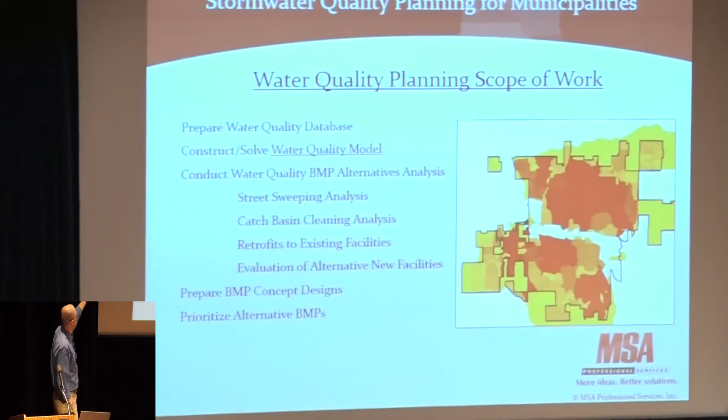Then we construct this water quality model, and again, that's really the bulk of what I'm going to talk about today in terms of conclusive evidence. We do this water quality BMP alternatives analysis. So we can look at street sweeping, catch basin cleaning, retrofits to existing facilities, and then of course the all-encompassing build something new.

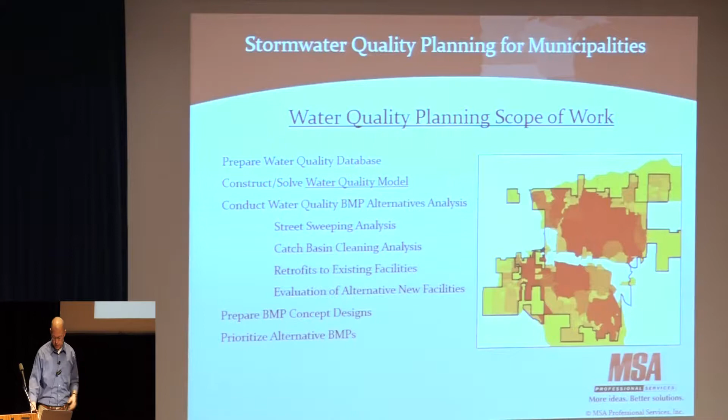And again, the idea here is we're looking at municipalities who are looking to make things better. And so let's look at the existing system first, because you've got a lot of investment in infrastructure, and by making small tweaks for relatively low cost, you can get quite a bit of improvement. Then we do some designs and prioritize according to social acceptability and, of course, cost effectiveness. All right. So again, I mentioned we're going to go through this pretty quick, but how do we develop this water quality database?

Pretty standard fare. You start out with some nice mapping. So on the board, we've got a drainage network, and the red lines represent the sub-watersheds that go to it. So we're looking for the natural channels, the ditches and the swales, roadside drainage systems, storm pipes, and of course your BMPs, your management practices.

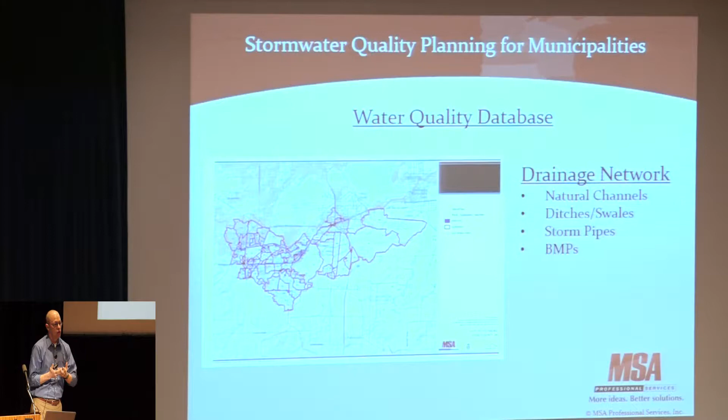So you subdivide all those things up into what's draining to what, and what's a critical resource, and what is it you're looking at. And of course, if there's a BMP, you want to delineate everything that's draining to that BMP, so you have an idea of what is the load going to that BMP and what's the demand that we're placing on it.

Well, then you add a layer, and those of you who are familiar with GIS understand that there's all these different layers. You can put them on top of each other like old style transparencies, and then as you look down on them, you can see that there's all this different information that's confined to that geographic area.

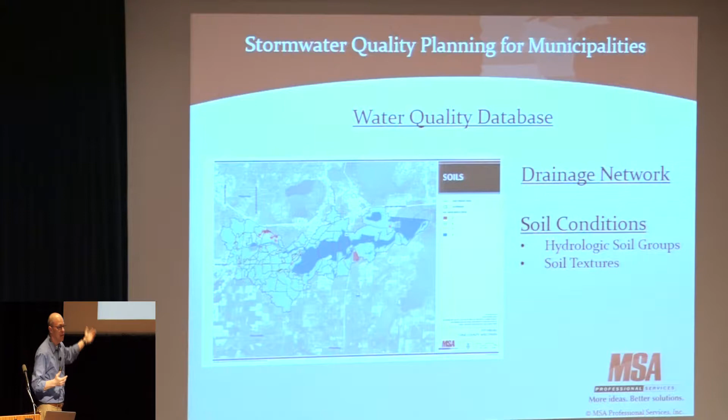A lot of the models are concerned with runoff from impervious areas, which I'll get to in just a second, but also from the pervious areas, from the turf, from the vegetated areas, things like that. And the two principal ways of looking at that are either through the hydrologic soil groups as classified by the USDA, or by the soil texture, which also are classified similarly. Sand, silt, and clay, or HSGs A, B, C, D, which are more or less comparative. And so you get a map like this, same watershed background.

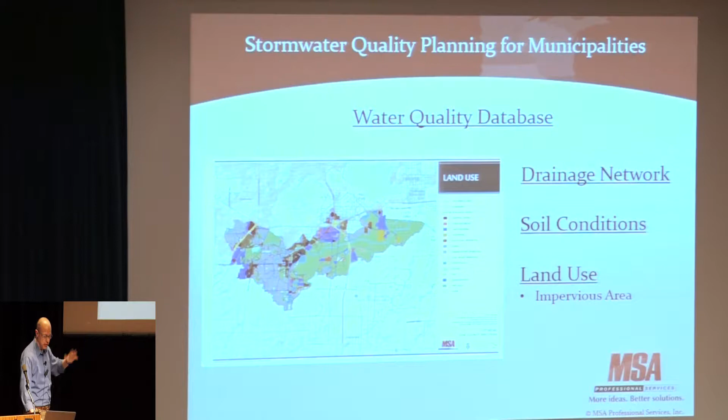And then finally we look at land use, which leads us to impervious areas. So the land uses you're looking at there are open space and low density residential, medium density, high density, industry, institutional, that type of very standard fare for urban planning. Where it really gets important is identifying the impervious area and the connectivity of that impervious area.

So the connectivity just has to do with, you've got this roof or you've got this parking lot, this impervious area. What is its drainage characteristics relative to the stormwater collection system? Is it directly connected, or does it flow from the impervious area onto a length of pervious area and then into the collection system? And at what point does it become disconnected? There's a very, very significant difference in the runoff contributions as well as the pollutant transport from impervious area that's connected versus disconnected.

So what I'm showing on the board here is a little study we did for a suburb of the city of Madison up in Wisconsin. And they didn't have a whole lot of information on their land use or on their impervious area. So we just took some samples and we said, hey, this neighborhood looks like it's got a different development pattern, and this neighborhood has a different development pattern. And the black polygons you see there are the different layers of imperviousness.

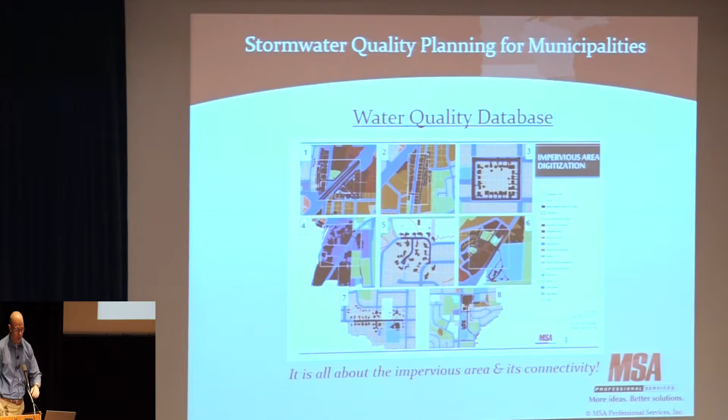Well, then you can apply various rules of thumb to say, all right, is this type of impervious area connected or is it not? And this is a whole bunch of text that I gathered from about a 5-minute internet search of impervious area connectivity. And I found references from Philadelphia, Wilmington, North Carolina, Washington, D.C., and New York, and the state of Wisconsin in particular have statewide standards for people who are doing stormwater quality assessments to determine what the level of connectivity is.

And they all kind of boil down to the same thing, which I've put on the board there as sort of the envelope of occurrences. And it's kind of interesting, they're very specific because you've got to be specific when you're doing calculations. But the first bullet says contributing flow path is no more than 75 feet. Well, darn it, I'm at 76 feet. I guess I'm now not disconnected. Well, really? I mean, there's that scatter that's involved, and there's factors affiliated with slope. And of course, there's construction practices.

You know, a piece of pavement that's glass smooth will behave entirely different than a piece of pavement that's all cracked and broken and it's got a bunch of different elevations due to heaving and things like that. But these generally describe a fairly decent way to estimate the level of connectivity.

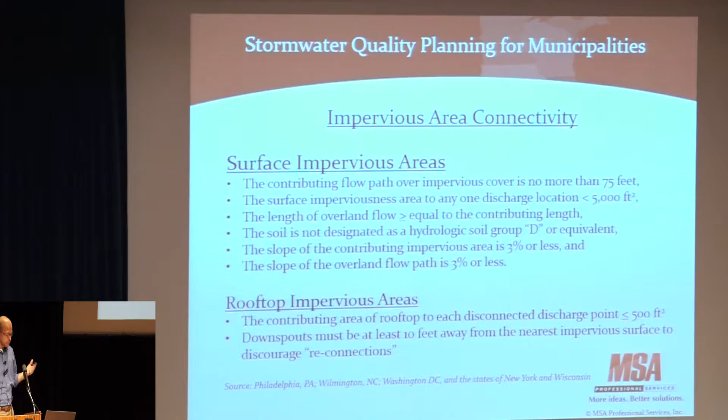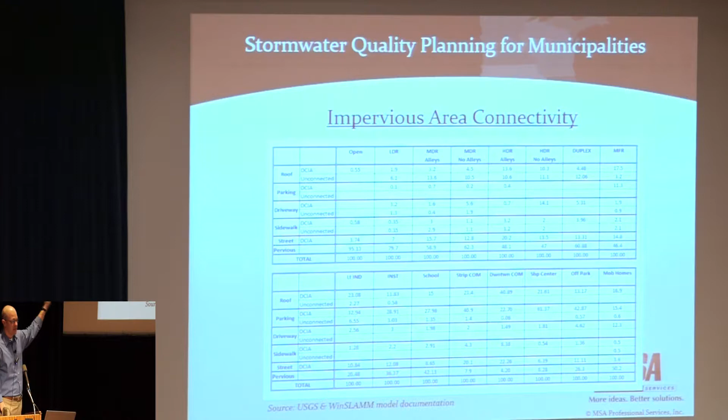Of course, if you don't want to go through that effort, the folks at the USGS, the Wisconsin DNR, and in part the city of Madison and the city of Milwaukee up in Wisconsin, have done some exhaustive research. And this is a table you're not intended to even look at, really, because it's got too many numbers on it. Let me simplify it a little bit. It describes the level of connectivity of typical Midwest land uses.

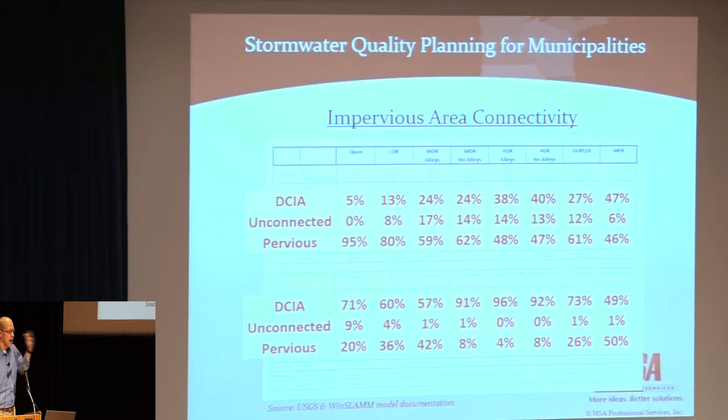And the rows on the top are basically open space and residential. And that top number, 5%, 13%, 24%, that describes the typical amount of connectivity of residential land uses. And then on the bottom, we've got industrial, institutional, commercial way on the right side. And you can see those numbers are much, much higher. So the idea is the higher level of connected impervious, the higher the density of that connected impervious, really the worse it's going to be for the watershed.

So this slide is something that I borrowed from the Center for Watershed Protection, and it provides a nice visual image of what this connectivity means. So the connectivity is not only producing a lot more runoff, because impervious area obviously sheds the water rather than absorbing it, but it also distributes it faster because the whole idea is get it out of town. We don't want it flooding. We don't want it causing a nuisance for us. And it changes the physical characteristics of the flow in these streams.

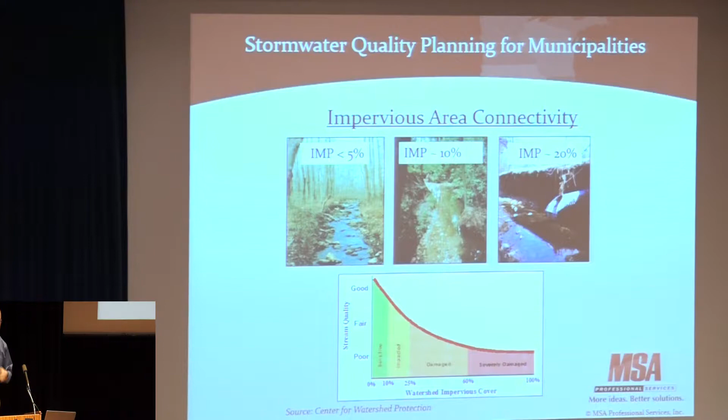So on the left, you've got a relatively low impervious area, probably approximating a natural condition or very, very low density rural type development. And on the far right, we're getting up there into the 20%. And they show that normally right around the 10% mark is where we start seeing impairment to the streams, at least as far as they're measured physically.

Well, we see the same thing when it comes to looking at water quality loads. So these charts here, I got a laser pointer, I think. Yeah. The blue line shows total suspended solids loads as a function of directly connected impervious area, and the red line shows total phosphorus. And I'm really going to focus on phosphorus because it's a smaller number, it's a little easier to wrap your mind around. And what we're seeing here is the directly connected impervious area increasing from 0 to 100, and then these are just the loads in sediment and the loads in phosphorus.

And these little dots are the different standard land uses from that previous slide. And again, this is all model data, so imagine there's some scatter around there. But basically, the thing to take away is for a typical Midwest community, with a mix of land uses and silty soils, hydrologic group B soils, you end up with about 260 pounds of sediment per acre per year of development, which is a lot. And you end up with about a pound of phosphorus per acre per year. So just remember a pound, because the slides as I go on are going to reference back to that 1 pound per acre per year.

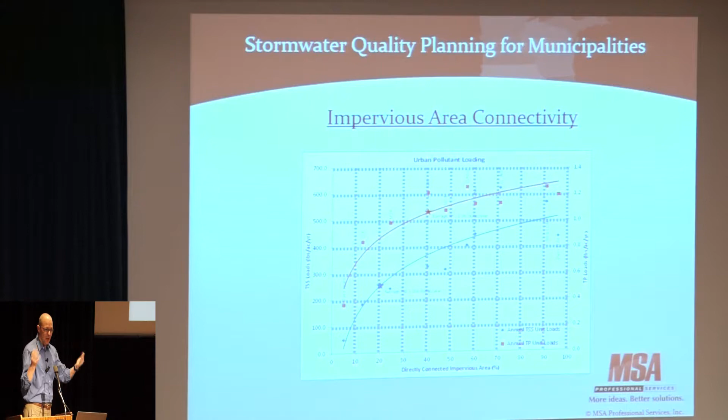This slide, first of all, I noticed right away when I was doing my review this morning, the units are pounds per acre per year, not pounds per year. But this shows where the phosphorus is coming from in terms of the connected impervious area. So we got commercial land use, industrial and residential, and on average, just looking strictly at the connected impervious area within whatever type of land use we're dealing with, about 1.2, 1.4, and 2.4 pounds per acre per year. And it's kind of interesting that the residential has higher numbers than the commercial. And there's some speculation about that.

I think the folks at the USGS in particular are doing some research on it, and have identified that it's not just the connectivity, but it's also the size of the piece of connected impervious. If you think about a residential lot, the building itself is smaller than a commercial building. It's smaller than an institutional building. And even though it's connected, it's got a lot more perimeter around it. So the atmospheric load, the load from grass clippings, the load from leaf drop, things like that, are able to accumulate on it a lot more. As opposed to a large commercial parking lot. There might be a lot of vegetation around the perimeter, but there's not as much in the middle.

And so the sort of pervious areas are being affected not so much by the impervious itself, but by the ability to collect it and transport all of that organic matter and the things that go along with it. This is in comparison, of course, to the undeveloped and the landscape, which undeveloped is basically historic, pre-settlement type conditions, as opposed to it being graded out. And landscaped is your typical yard.

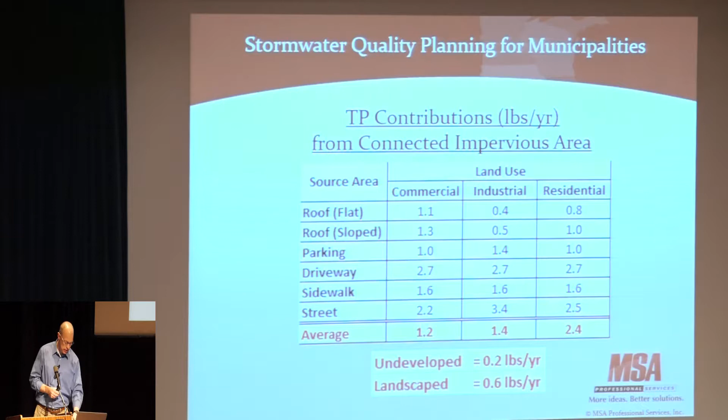All right, so crunch the numbers. Most of this stuff is done using GIS. In fact, all of it really is done using GIS. So if you go back to the beginning of my presentation, you've got watersheds and drainage network, you've got land use, you've got soil, you've got impervious area. You have all of this data that gets crunched down.

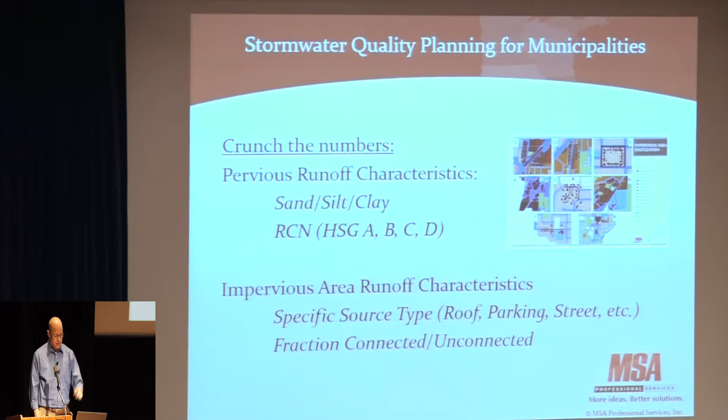And so you might have one watershed that's got a designation of which BMP it drains to. And within that, there's subdivisions that are soil type A, B, C, D, or sand, silt, and clay. And you've got different land uses, different impervious areas, and different connectivity. And one watershed might break down into hundreds, if not thousands, of unique combinations of all of these different source area parameters. Well, in GIS, it's really just about as easy as a push of a button to crunch all of that data. And when you crunch it all, you can then import it into a model.

I've been talking model. These are the two models that, in my experience, and I've been doing this now for over 20 years, really get the most play in urban water quality planning. The first is the WinSLAMM model, the Windows Source Loading and Management Model. That model is put out by PV and Associates. It's really got its origins with the University of Alabama and a professor by the name of Robert Pitt. He's been doing a lot of research on small storm hydrology and urban water quality.

And it used to be back in the day that this model P8, which I'm going to screw up, but it's like pollutant passes through pits, ponds, puddles, pools, something, 8 Ps. P8 used to be, back in the day, the superior model in my opinion. It was much more able to do networking and evaluate complex systems of management practices.

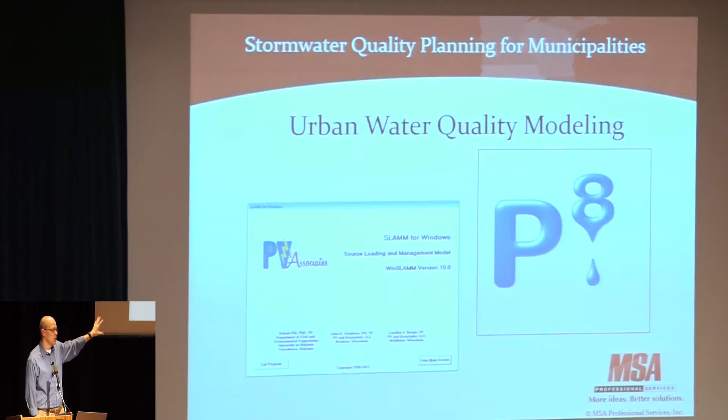The SLAMM model has eclipsed it, specifically in the last year, because it's also become able to model distinctive networks of different BMPs. But WinSLAMM in particular has gotten lots more attention in terms of research on different practices, grass swales, permeable pavement, catch basin cleaning, all sorts of things that SLAMM can do that P8 cannot. And so WinSLAMM is really taking the forefront in doing these water quality assessments. In fact, the data I'm showing you today is pretty much exclusively from the WinSLAMM model of different projects that we've worked on.

So again, you've got all this data, and you can crunch it down in GIS, and it's really pretty easy to do. Case in point, this is a small little community. They had no real reason to do a water quality plan, but they decided, hey, we live on Green Lake, which is a resort class lake, and we want to make sure we're doing what we can to protect the quality of that lake. So what can you guys do to help us out here? And we don't have any money to pay for it, by the way.

So we did this study, and I think it took us about 20 hours, which is not very much. We studied a community of about 3,000 people or so, and we were able to do these pollutant hotspot maps. There's different colors you can see on the board there. Similar to that first map in the introductory slide, the darker the color, the more the load.

And so the community was able to say, oh, well, geez, we have a storm sewer that runs through here. Maybe we should do something about how water gets to that storm sewer, or maybe we should put something at the end of that storm sewer to collect the loads. When we looked at all of these different loads across the board, and again, there's different land uses in there, there's different soil types.

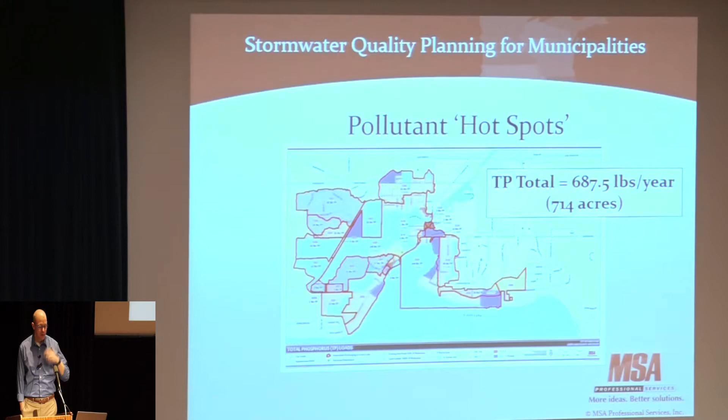We had a study area of about 690 to 714 acres with 690 pounds per year, so again we're hovering right around that 1 pound per acre per year of phosphorus.

This is dovetailing with a presentation geared towards wastewater treatment plants. My colleague had a slide that said there's a lot of pee in poo. I had to follow that up by saying there's a lot of pee in stormwater too. This shows the conclusion that we're dealing with about 1 pound per acre per year of

phosphorus load in your average urban land use. Obviously, open space and parks are lower than that, but some are higher, and they average out to about that 1 pound per acre.

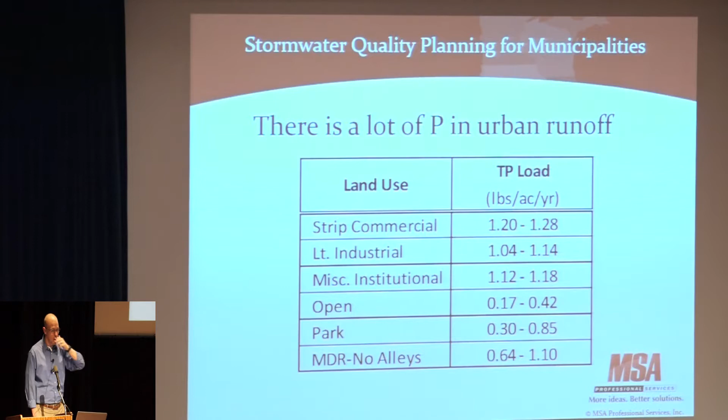So bearing in mind 1 pound per acre per year, and you've got this hotspot map showing different locations have more or less loading, how do we go about figuring out what to do? Well, it's all about targeting that management practice placement to figure out what is, in fact, the best management practice.

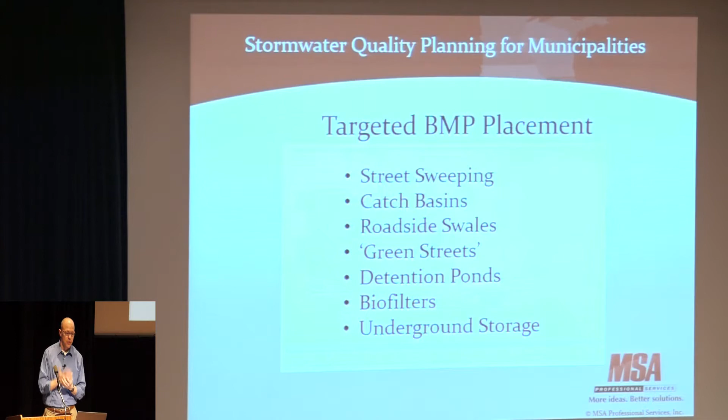So let's look at what they're already doing: street sweeping, catch basins, roadside swales, green streets, detention ponds, biofilters, underground storage - all these different things we can factor into the structural and operational practices that control water quality in the community.

Street sweeping - the USGS, along with the City of Madison, just recently did a big study. I'm not going to get too much into this for fear of getting into the next presentation, because they're going to talk a lot about it.

What they showed was that the mechanical sweeper, given certain assumptions like density of parking, type of street, and the number of passes per week - I assumed once per week, a pretty aggressive street sweeping program - gets about 0.7 to 1.4 pounds, averaging about a pound per street mile per year removed by street sweeping, which is not bad.

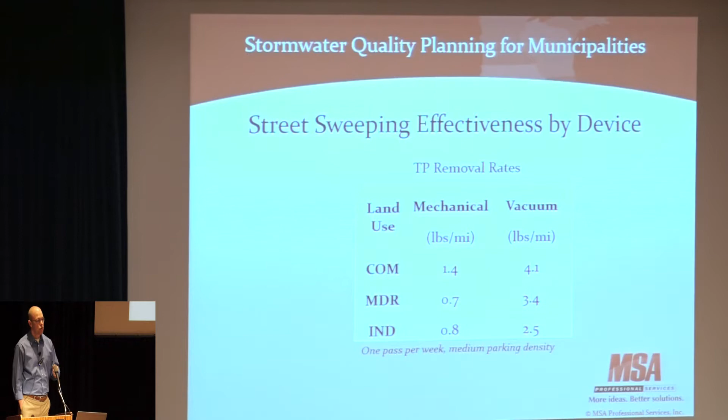You switch over to a vacuum sweeper, though, much higher efficiencies, and you get between 2, 3, 4 times that amount. So just by changing the operation of a community to a different type of practice, you can get a very large improvement.

Contrarily, if you have a parking ban, you don't have that issue. Or if you sweep residential streets during the day when people are mostly at work, and sweep commercial streets late at night when businesses are closed, you can get that same result.

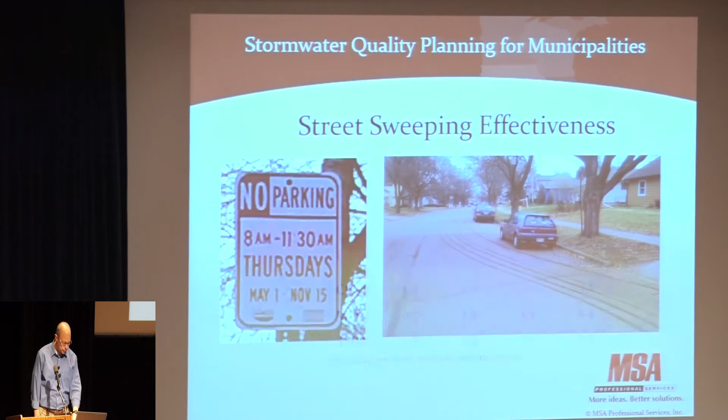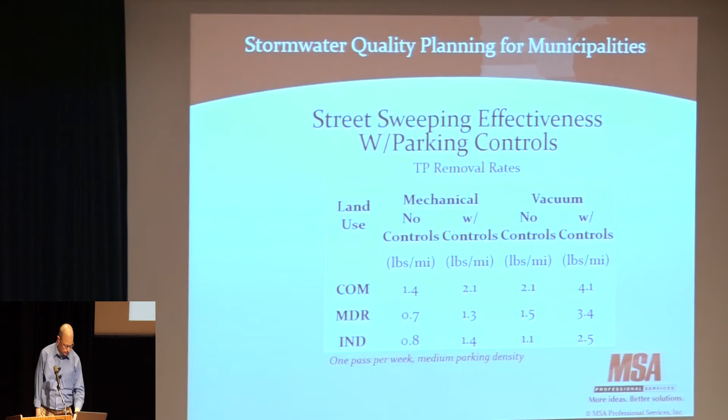Catch basin cleaning - so you've got all these manholes in the street. You want to rebuild your street because you've got a capital improvement program to rebuild that street, so replace some of those catch basins with sumps.

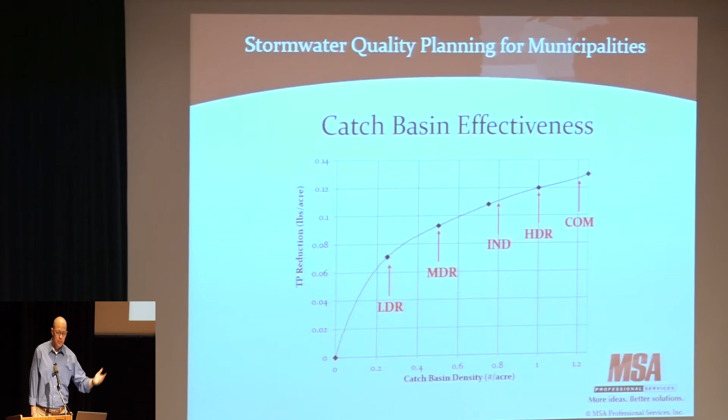This shows the efficiency of those catch basins as a function of density and phosphorus reduction. When you've got a typical land use - low density residential, medium density residential, industrial, getting up there in the higher intensities of directly connected impervious area - you can get 10%, 15% reductions in phosphorus that you would not have gotten otherwise. Basically, you're rebuilding that street anyways, so put in some different practices and improve your water quality.

We actually went out and did some infiltration testing and did some actual clear measurements, and found that with these different swale densities, we get really efficient phosphorus reductions. In fact, when you get a swale density up to about 400 feet per acre, you get about 70% reduction of the phosphorus that's in the stormwater runoff.

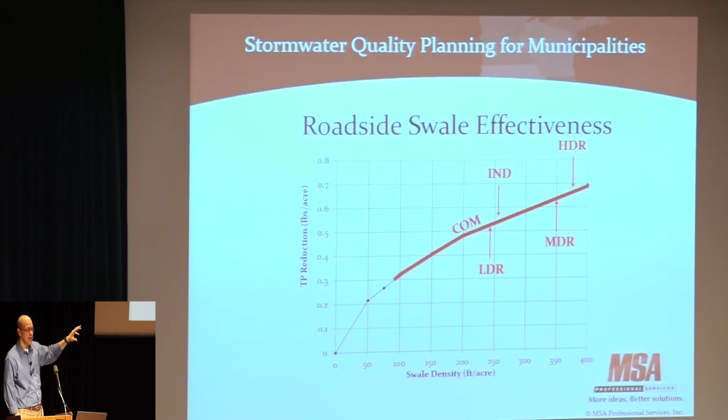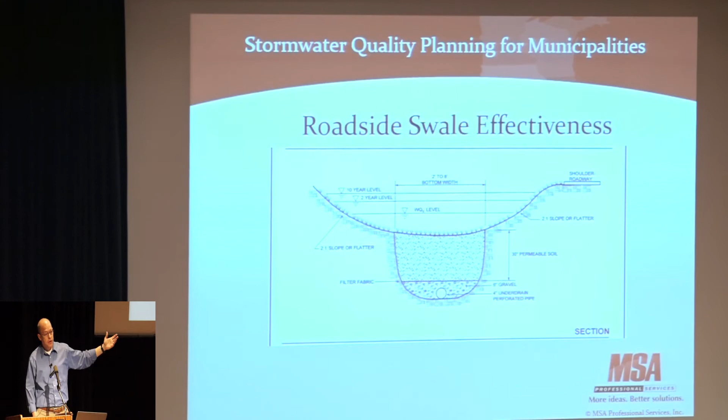Here's that same kind of graphic. So if they're high density residential or medium density residential, you can get really substantial improvements through phosphorus reduction in swales. You can augment those swales by putting in engineered soils and underdrains, and even communities known for their clay soils can have even higher efficiencies in terms of phosphorus reduction.

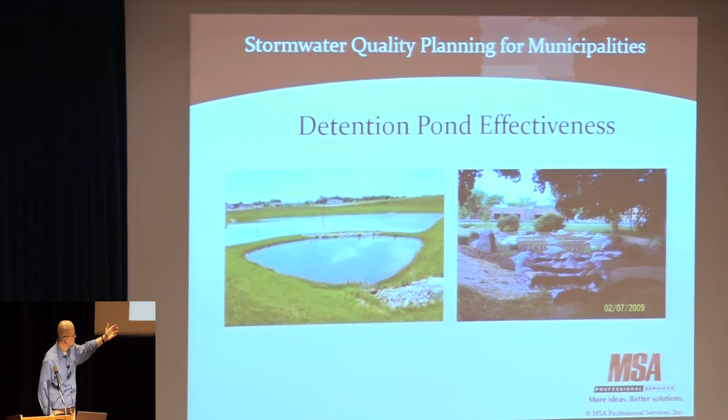And of course, you can't do a water quality plan without at least considering one detention pond. Here's a couple different varieties. There's a wet pond with a forebay on the left, and the one on the right is actually a variant of a pond called a biofilter. It's intended to have infiltration, but it's served by an underdrain.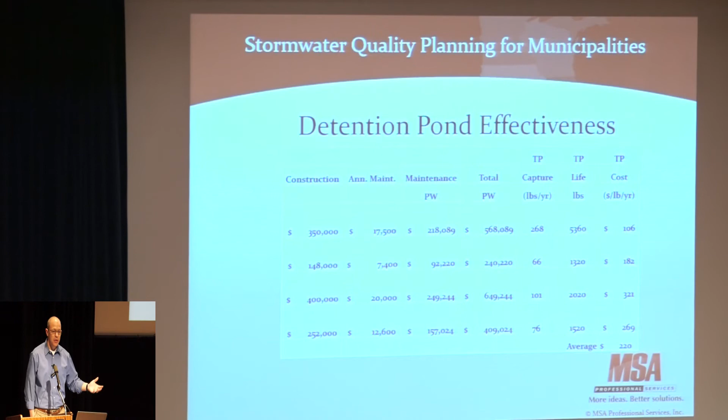All of these things can be very efficient at phosphorus and sediment reduction, achieving 80% and higher sediment reduction, around 40 to 60% phosphorus reduction, at a fairly affordable cost compared to the life cycle cost of a treatment plant. So we're looking at 220 pounds per year, or $220 per pound per year, in comparison to treatment plant costs, which is a large number. But when you're looking at making trades for phosphorus, in this case versus treatment plants, it's very affordable.

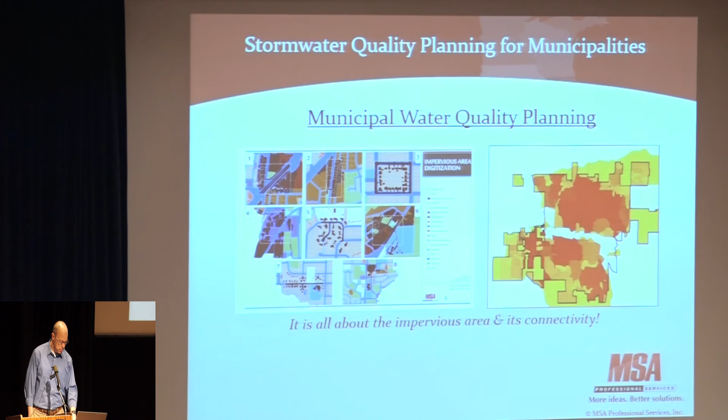That gets me to the end here, which is good because I'm getting a little bit back on schedule. It's really all about figuring out the impervious area and its connectivity. So you have to do at least some critical assessment of the community you're working in, with the idea that you're going to build a model, or at least crunch some numbers and get data, to develop a hotspot map. Then you target your placement of the BMPs according to the land use in that area, what can be done, and what's socially acceptable. You don't necessarily want to build a giant facility that occupies existing development, but if you can improve your street sweeping or put in vegetated swales or some other softer practice that's not a substantial change to the way the city does business, you can have pretty big improvements. Which takes me to the end.